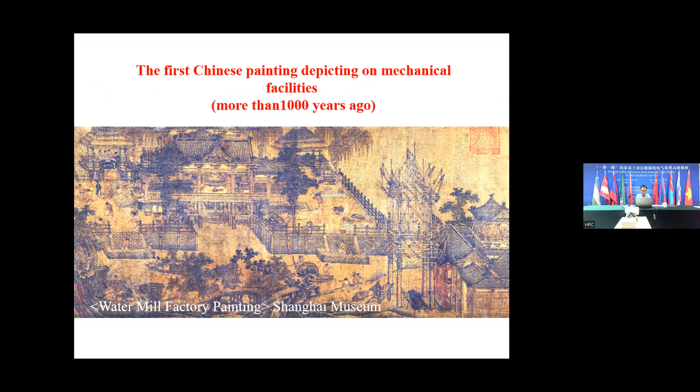Another thing I want to emphasize is this painting, which was collected in the Shanghai Museum. It is the first Chinese painting depicting mechanical facilities, more than 1,000 years old. We could see clearly it is the utilization of the power of rivers. And the modern turbine is also very similar to the hydro, right? It uses the same ways to generate electricity, or uses the power of rivers to get the corn, to get the food.

It is the same as how to use the water to generate electricity, or use the water to make the food. And you can see the water is diverted to the power and generates the electricity; it is quite similar to the sustainable utilization of hydropower. We use the same ways.

And we know hydropower is also very useful for rural electrification. They use the power of rivers to generate electricity and supply it to rural areas, rural communities. The benefit of electrification is mainly in three aspects. First, it's good for health because of indoor air pollution. If you use electricity, there will be no indoor air pollution. Also, we can save a lot of time collecting firewood, so the time budget. And it supports economic growth, especially irrigation and productive activities in rural areas. So these are the three benefits of electricity.

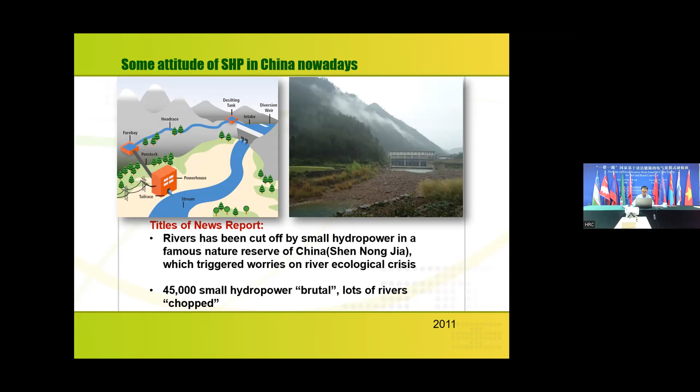But nowadays in China, the attitude towards hydropower has changed quite a lot. In history, it was very useful for rural development. But nowadays, I just cited some titles of news reports, such as rivers have been cut off by small hydropower in a famous nature reserve of China, which triggered worries about a river ecological crisis. Another news title is that more than 45,000 small hydropower stations are brutal and lots of rivers are chopped. But globally, we also see hydropower generation enjoying a very high increase.

So there's a dilemma, right? On one side, we say hydropower is a clean and renewable energy. It is good for rural electrification. It is also at the crossroads of the water and energy nexus. And it is largely emission free. And nowadays, as a lot of renewable energy has been used in our daily life, balancing intermittent renewables such as wind and solar is also a very good function of hydropower.

But on the other side, we know the development of hydropower could reduce the downstream flow, and it changes the hydrological regime of the natural rivers. And if you build a reservoir, there will be some resettlements. And it also leads to intervention into the connectivity of the river system. So there are some advantages of hydropower and also disadvantages.

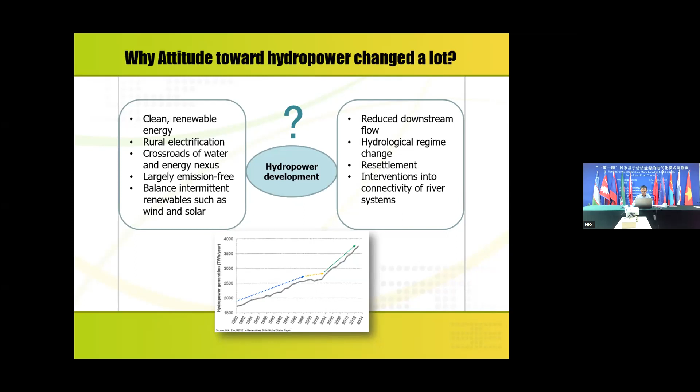But we know there's a very fast increase in installed hydropower generation. So if we want to get more hydropower development, what is our attitude, and to get the ideas of green hydropower, we need to make a deeper analysis of the environmental and social impacts of hydropower.

And talking about the environmental impacts of hydropower, we know different types of hydropower have different impacts. One of the types is the run-of-river type. There's no big reservoir, but it causes a river reach between the dam and the power station, which leads to reduced water or even drying out in this river reach. And if there's a lot of hydropower development in the same river, there might be some cumulative effects of the cascade hydropower development.

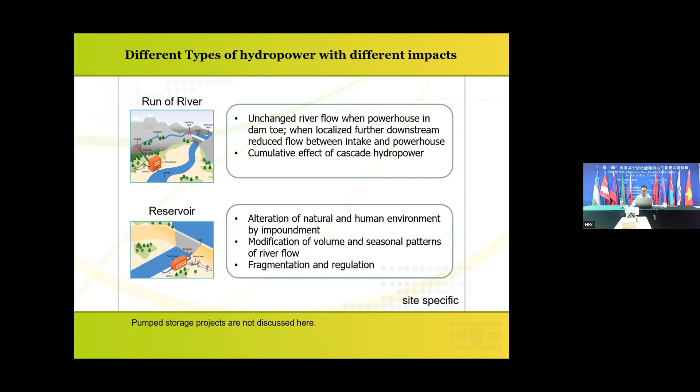Another very typical type of hydropower development is the reservoir, right? We have a big reservoir and the hydropower station just below the dam. It changes the natural and human environment by the impoundment. And the reservoir also modifies the volume and seasonal patterns of the river flow, which causes fragmentation and regulation of the river flow. So these are different impacts by different types of hydropower.

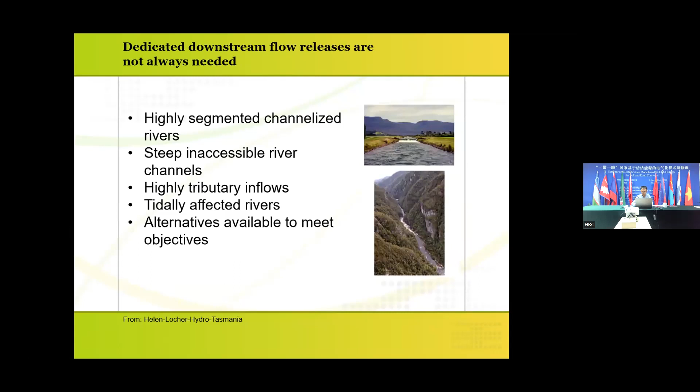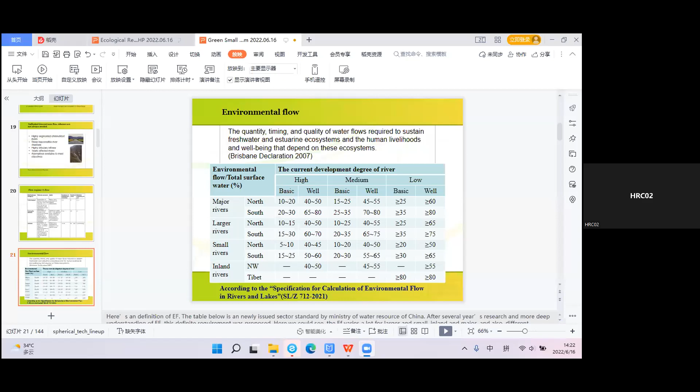Okay. I think you can hear my voice, right? Okay. Well, let's continue. There were some problems with the connection, but now it's okay.

In China, we have already published some standards, which is the specification for calculation of environmental flow in rivers and lakes. And in these standards, there's some recommended environmental flow for major rivers, larger rivers, and small rivers. You know, China is quite large, and it is also decided by the current development degree of the rivers.

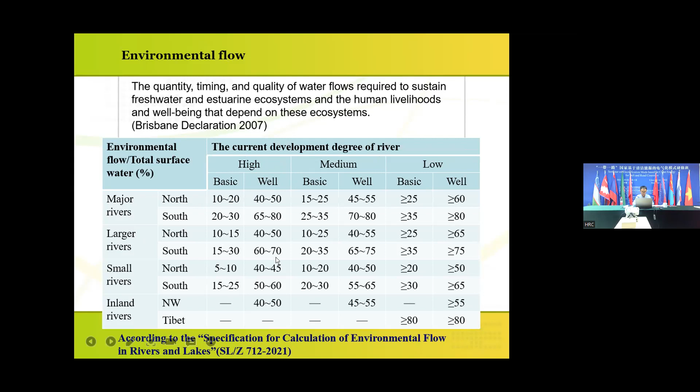For some rivers, the development degree is very high, or medium, or low, with different recommendations of how to calculate the environmental flow.

Another impact of the development of hydropower is called hydropeaking. You know, hydropower plants use the water to generate electricity. Sometimes they start the operation of the hydropower unit, sometimes they close down the hydropower unit. But in the river reach below the hydropower plant, you could see the water level change quite frequently and very fast. That may cause some negative impact on the river reach below the hydropower plants.

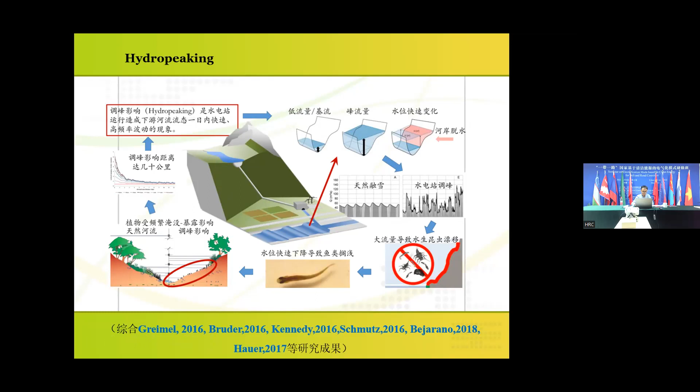There might be some measures for alleviation of the impact of hydropeaking. Maybe they can change the operation of the hydropower plants so it does not change very frequently. There are some universities or institutions focusing on research of hydropeaking. Here is an example, the research base for hydropeaking in Austria. There's a reservoir upstream, and they control the water flow to simulate the impact of hydropeaking to try to find ways to alleviate its impacts.

Another impact of hydropower development is called impoundment, right? When you build a very large, very high dam, the river status is changed from a river to a lake, right? The reservoir is very similar to a lake system. So it is a big change for the water ecosystem.

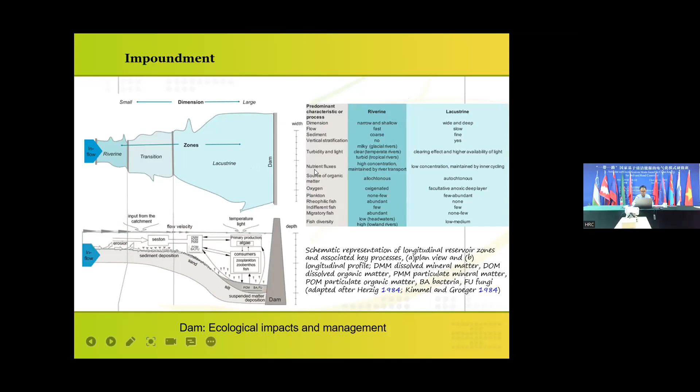And you know, after the building of a lot of dams and projects, the connectivity of the river basin is very highly impacted. A stream corridor with connections among its natural communities promotes the transport of materials and energy and the movement of plants, fish and animals in the river.

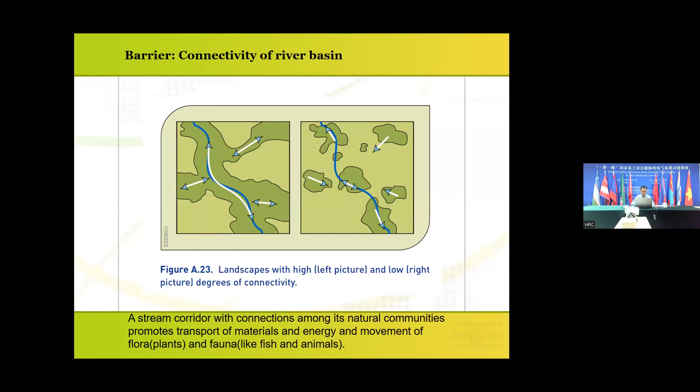There's an example in Mexico. You could see different scenarios, such as the baseline scenario on the left, scenario 21 in the middle, and also scenario 7. These two scenarios have similar installed hydropower units and similar energy capacity, but very different river connectivity. In the middle, scenario 21, the river connectivity is very low, right? Only this part of the river is connected together. But if you develop the hydropower as in scenario 7, the impact on river connectivity is not very high, with similar energy capacity.

That is a very typical example of why we need to think twice about the different developing ways, different scenarios to develop projects. Maybe first these two, and then the other. Which one is developed first? Which one second? Different scenarios, different connectivity. However, we do not only consider the connectivity of the river basin. When considering projects, we take a lot of factors into consideration, such as the grid and the people living nearby. So we need to consider a lot of factors to make the decision.

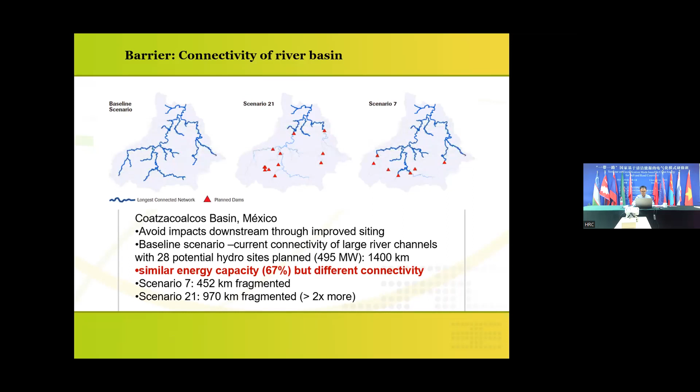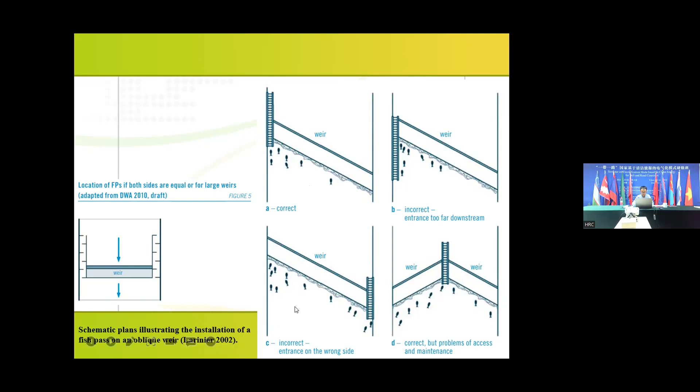There are also some suggestions on how to design the fish passes. Some are correct, and this one is not correct because the entrance is too far downstream. You also need to consider the maintenance of the fish passes. So there are some technical suggestions on how to build fish passes. Another impact is on river morphology.

During the development of the cities and townships, we sometimes seize a lot of the land in the river bed, right? Before, the river bed was quite wide, but nowadays a lot of roads or even some crops are in the river bed, which seizes the space of the rivers. That is also another impact of the development.

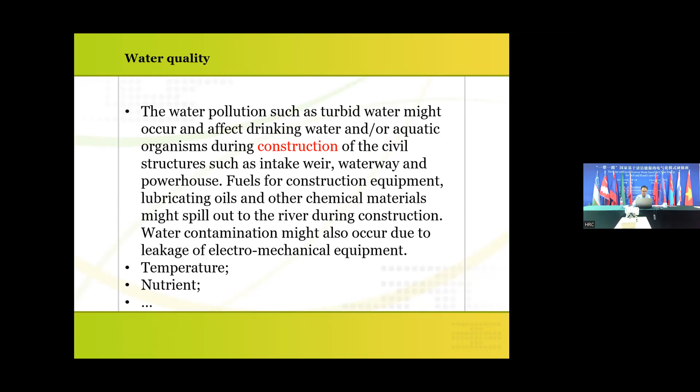And another impact is the water quality. Water pollution, such as turbid water, might occur and affect the drinking water, especially during the construction period. It might also increase the risk of disease when you build a dam or create ponds and the mosquitoes come out.

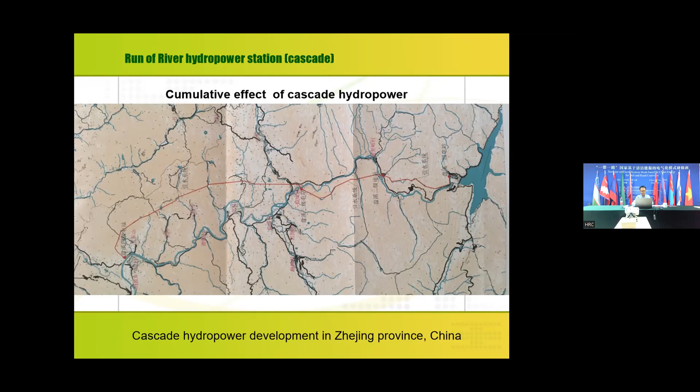Before, we were talking about single projects, but after we build a lot of hydropower projects, there might be some cumulative effects of the cascade development of hydropower. In these examples, along this river reach, you can see a lot of hydropower projects built. They divert the water through the red pipeline or the red tunnel to generate electricity, but leave quite little water in the river. So if you build a lot of these hydropower plants, the impact is cumulative. So we also consider the accumulation effect of the cascade development of hydropower.

Some of the reports have summarized the impacts of hydropower development. Some checklists are good if you need to develop a hydropower plant, such as: is the project consistent with the higher programs, policies or plans? This is very important. You need to first ensure it does not violate the higher programs and policies, such as whether the project is in protected areas like a national park or wildlife protected areas.

Especially in China, some hydropower is built in protected areas because historically the site was not named as a protected area, but after maybe 20 or 30 years, the site of the hydropower plant is named as a protected area. That is a very difficult scenario. So before you build the dam or the hydropower plant, you need to be sure it is not in a protected area, or might not be in the future. Otherwise your project might be removed or retired according to the requirements of environmental protection.

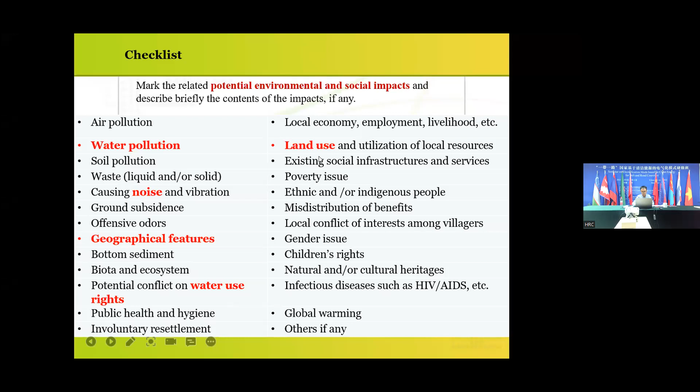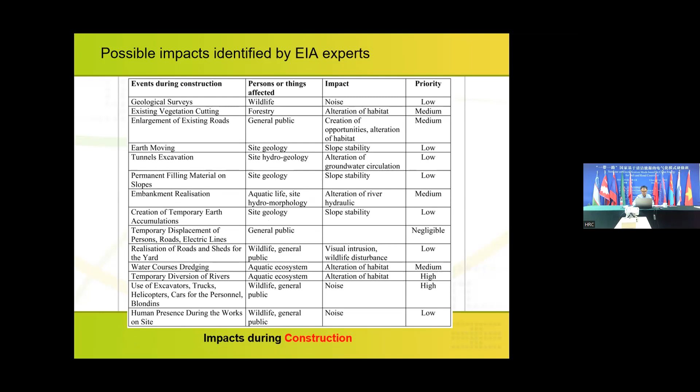Also mark the related potential environmental and social impacts and describe briefly the contents of the impact, such as water pollution during the construction period, the noise, the water use, the land use. Those are factors we need to consider during the construction and development of hydropower plants. This is the summary for the construction period, such as the temporary diversion of rivers, which is a very high priority, and also the human presence during the works on site. The noise impact is low. This is the summary of the possible impacts identified by the environmental impact assessment experts.

We also know some measures to alleviate the impact of hydropower development, such as multiple purposes: not just hydropower generation, but also water supply, irrigation, and flood control. In this example in China, the reservoir is even used as a rowing training base, which is quite good for the multiple purposes of hydropower plants.

Also in China, we have quite strict management of hydropower plants. For example, hydropower plants need to install a minimum flow online monitor. Each hydropower plant needs to have the monitor. Some are online, some are not, but every hydropower plant in China needs to discharge the e-flow, the environmental flow, and almost all hydropower plants have online monitors.

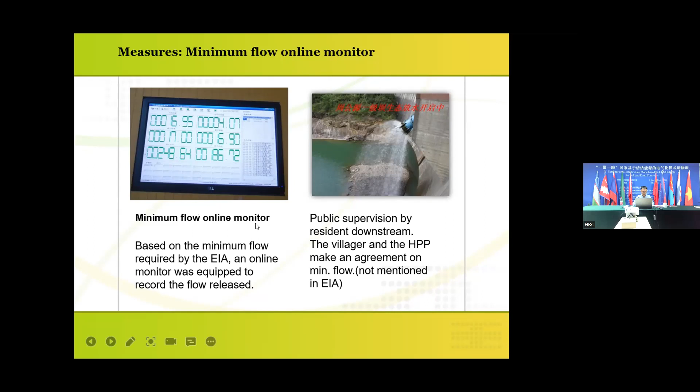Another measure to alleviate the negative impact of the river is to build small, ecological weirs to leave more water in the river reach. Another measure is the ecological operation of the power plants.

From these examples, hydropower is a very typical case of the water-energy nexus. The reservoir is used for water supply, for irrigation, it's good for food and water supply, and it also makes energy generation. So hydropower is a very typical case of the water and energy nexus. It can meet both water and energy needs, which is very important for the whole human society.

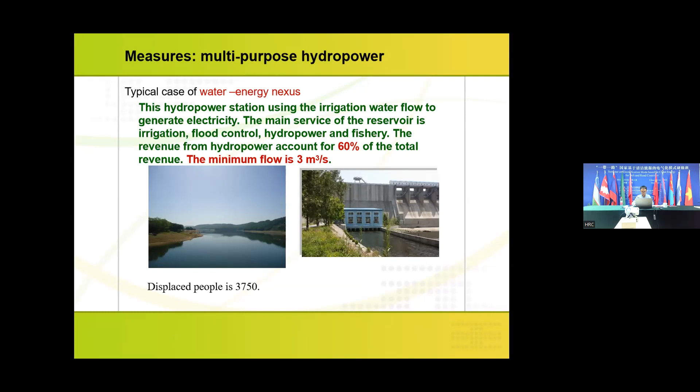There are still about 2.5 billion people who have unreliable or no access to electricity, and 2.8 billion people live in areas of high water stress. If we develop hydropower plants with reservoirs, we could solve these two problems at the same time. That's why we use the water and energy nexus approach to tackle these two problems simultaneously.

For the reservoir, we have a lot of other purposes or functions, such as it could be a national park or water park. It could be good for navigation, irrigation, fishing, flood control, water supply, and generation. So we could consider all these different purposes at the same time. This is very important for sustainable development of hydropower plants.

You may ask why we need green small hydropower. Going back to the beginning of the presentation, we know hydropower on one side has a lot of advantages, and on the other side has a lot of negative impacts - some environmental impacts, some society impacts. If we have green hydropower standards, we can evaluate hydropower, whether it is green or not, and how to make hydropower plants more green. That is why we need green hydropower standards.

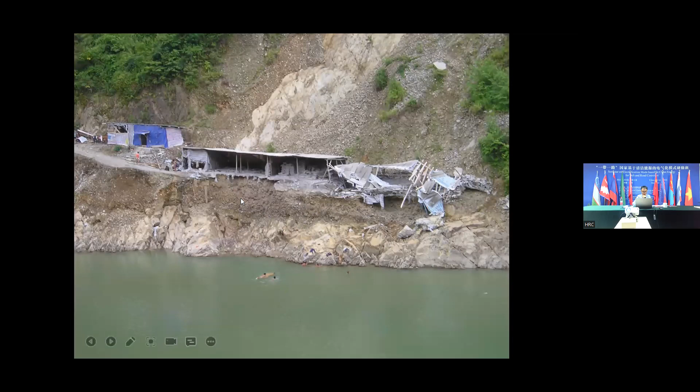For this hydropower station under construction, I had been there before the accident. That is the picture I took one year before the accident happened. That year, the flood went over the dam and destroyed the riverbank. Here you can see the picture. But after one year, there was also a very serious safety accident at that hydropower plant.

In China, the Ministry of Water Resources launched a lot of safety check activities, trying to improve safety levels. Here are some pictures showing the removal of increased parts which are not allowed, in Jiangxi province.

For the owner of the hydropower plant, they want more water to generate more electricity, which means more money. So they might increase the dam height, which is not allowed and not safe. You can also see the lowering of the overflow dam in Shuangshui hydropower plant in Guangdong province. So these are examples of China trying to reduce safety risks.

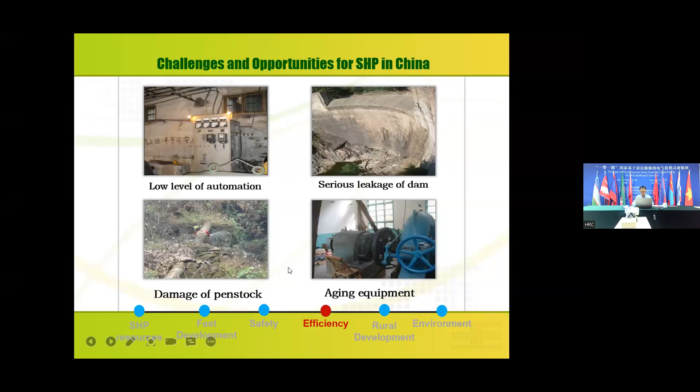The second challenge for China's small hydropower is efficiency. After many years of operation, there is a low level of automation, serious leakage of dams, problems with the penstock, and aging equipment.

Around 2012, China launched a program called Efficiency Improvements and Capacity Addition at Existing Small Hydro Plants. The ministry will give subsidies if you make efficiency improvements and capacity additions, with different subsidies for different regions of China.

Another challenge for China is rural development. China launched a program called the National Small Hydropower Ecological Protection Project, which encourages local farmers not to cut forests or use firewood to cook, but instead use electricity generated by small hydropower. They also enjoy a very cheap electricity price. That is a good way to keep farmers from cutting forests, which is good for protecting the environment and the forests. That is a very typical project in China, which we call the National Small Hydropower Ecological Protection Project.

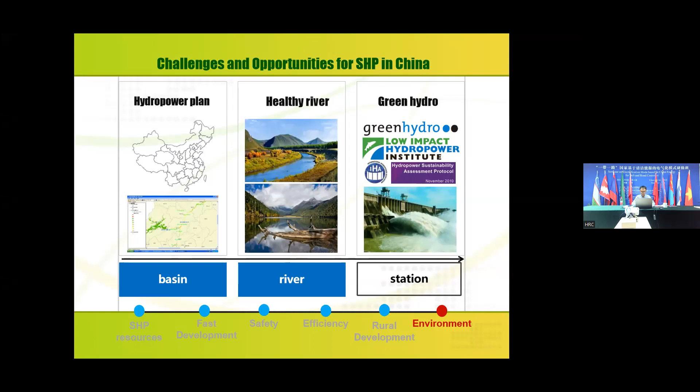At the small hydropower station level, we have learned from the experience of America, Switzerland, and also the Low Impact Hydropower Institute and International Hydropower Association, on green hydropower, trying to solve environmental problems. As I mentioned before, the green hydropower concept is from Switzerland, and the low impact hydropower standards are from America. Also, the IHA, International Hydropower Association, published the Hydropower Sustainability Assessment Protocol in 2010.

There are also other institutions or countries that have developed their own green hydropower standards or similar sustainability standards, such as the Mekong River Commission, which has published guidelines, and Austria, which has developed codes called HYCOM. The International Commission for the Protection of the Danube River, ICPDR, has also published guidelines for developing sustainable hydropower plants.

So I will give a quick introduction about the green hydropower standards published by different institutions or countries.

Here is a summary of all the existing green hydropower standards in the world, like the small hydropower, Green Small Hydropower Assessment Standard published in China in 2017, with a revised version in 2021. Also in Austria, they published standards called HICOM in 2015. For China's version, we learned a lot from the USA and Switzerland. There's also a very good sustainability hydropower protocol published by the International Hydropower Association in 2010.

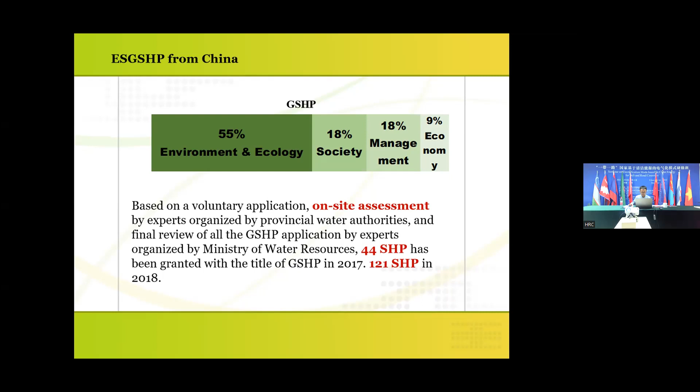55% is focusing on the environment and ecology aspects, 18% on society, 18% on management, and the last 9% on the economy. This evaluation is based on an on-site assessment. Nowadays, in 2018, there are 121... after 5 years of implementation of this assessment, more than 870 hydropower plants have already passed the green hydropower assessment. This is the standard published from Austria.

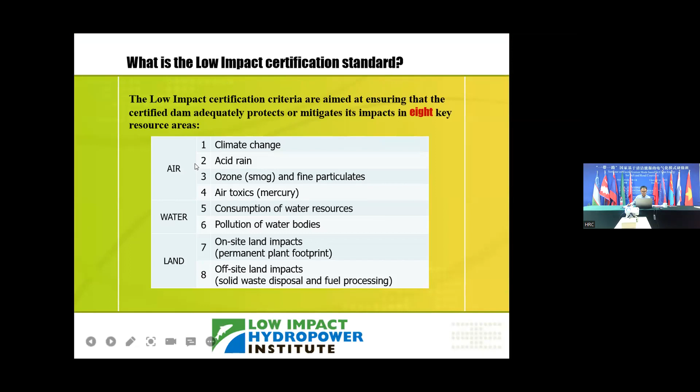This is published from the USA, and it covers 8 aspects, covering air, water, land. It is good, the standard is tough but achievable. It encourages hydropower plants to try to apply for the assessment or certification of low impact certification.

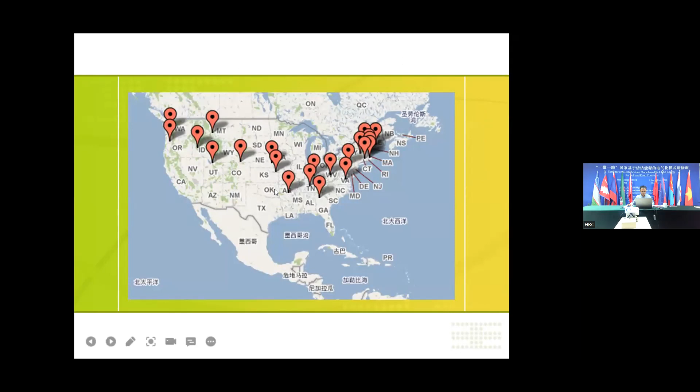A lot of hydropower plants have already been certified by low impact, using a very easy assessment method, like a questionnaire covering flows, water quality, fish passage protection, watershed protection, threatened and endangered species protection, and facility recommended for removal. It also updated the standards in the second version, with some changes to the aspects.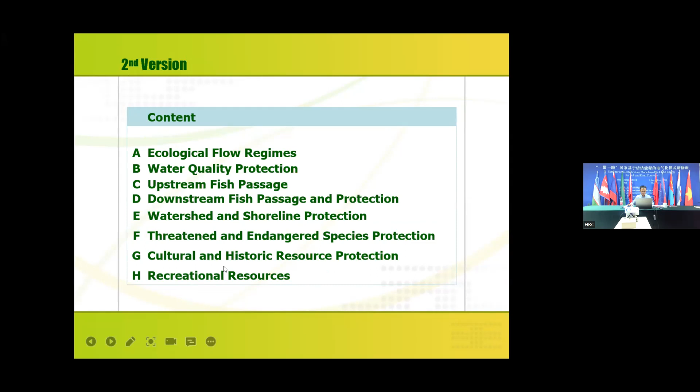There is another standard called the green hydropower standards developed by Switzerland. It considers two aspects: one is people's growing concern for the conservation of natural river ecosystems, and on the other hand, some people are willing to pay extra for so-called green electricity. So this standard is connected together with the green electricity mechanism. The purpose is a new assessment procedure for evaluating environmentally friendly hydropower production.

For green hydro, they have two different levels. One is the eco-labeling scheme for green electricity, and another purpose is to facilitate communication with electricity customers. Because users of electricity do not directly understand the quality of the electricity products, a credible certification of high ecological standards is essential for successful green electricity marketing.

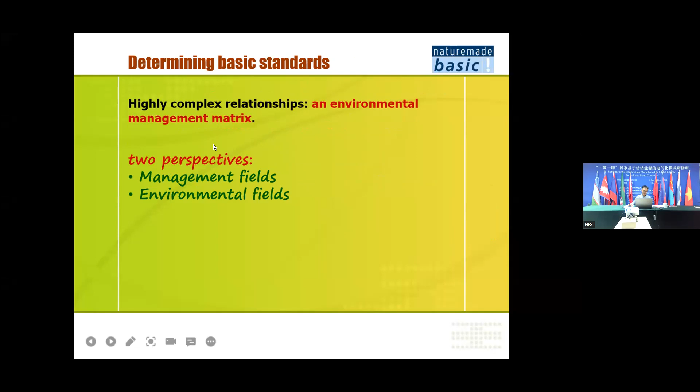For the standards from Switzerland, there are two conditions: one is the basic requirements for green electricity, and the higher level is called eco investments. For the basic standards, it covers two aspects: one is management fields, one is environmental fields.

Here are the standards. The management fields cover the minimum flow, also called eco flow or environmental flow, and also hydro peaking, which I have already talked about before, the impact of hydro peaking, and also reservoir management, bed load management, and power plant design.

For the environmental field, it focuses on hydrological parameters such as hydrological regime change, the modification of river regimes, and the connectivity of the river ecosystem. After you build a lot of dams or weirs, there's also solid material and morphology, landscape, and species, the flora and fauna.

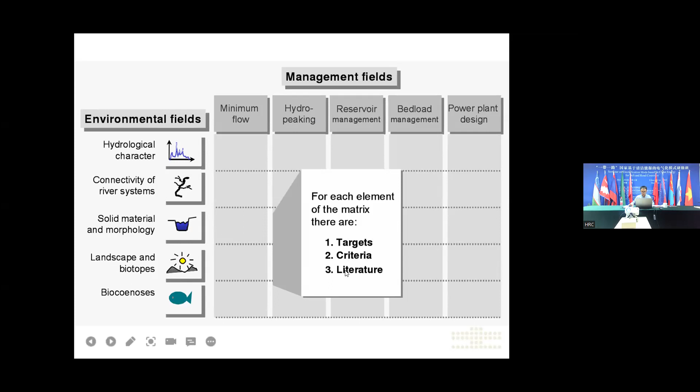For the standards by Switzerland, they have a matrix. For each element of the matrix, they have targets, criteria, literature. You could find the sort of problems and also the measures for the problems.

In short, for the hydropower plant owner, they need to pay the certificate costs and invest in some eco restoration measures, and they can enjoy a good increase in electricity price to subsidize their investments in eco restoration, as well as benefits for their company image. But for the implementation of this mechanism, after more than 16 years, only about 3% of the total hydropower production in Switzerland is certified.

Another standard is from the IHA, International Hydropower Association. They have carried out sustainability guidelines and protocols. These standards cover 4 aspects: environmental, social, technical, and economical perspectives.

But when we look back to the two standards we introduced before, from Switzerland and from the USA, their standards just focus on the environmental aspects. For the standard from IHA, it focuses on 4 different aspects, not only environment, but also social, technical, and economical aspects.

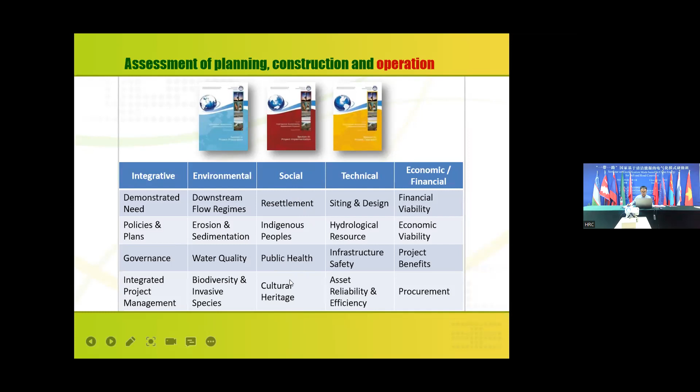In the operation stage, they have several aspects and around 21 indicators, such as the environmental categories. They have downstream flow regimes, water quality, and in the social aspect, they have resettlement, public health, and a lot of indicators trying to make the assessment of the hydropower development. Yes, here is the list. In operations, it is 19 indicators.

And for each indicator, they have 5 levels. Level 1 means there are significant gaps related to basic good practice. Level 5 describes proven best practice on a particular sustainability issue that is demonstrable in multiple country contexts. So from level 1 to level 5, there are different meanings.

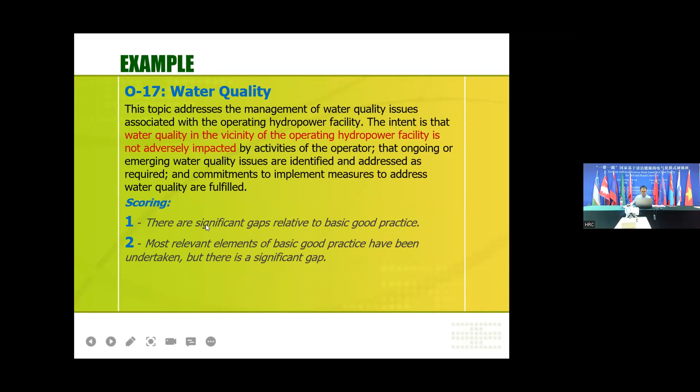For example, for indicator 17, water quality during the operation stage, if the water quality in the vicinity of the operating hydropower facility is not adversely impacted, it could have different scoring for 1, 2 to 3, and also for level 5, in several aspects.

And now I have made some comparison between these different standards, like the scale, whether it is a national standard or international standard, whether it's legally binding or just a recommendation, whether it's covering the whole life cycle or only focusing on the operation stage, whether it is including pumped hydropower plants or not, whether small, medium or large hydropower plants.

So we make a comparison of the different green hydropower standards, trying to find the problems and how to improve the standards. Here in this picture, you can see some of the standards follow pass or fail patterns. The China's version and the standards from the USA are pass or fail. If you pass the assessment, you will get a label called green hydropower or low impact hydropower. But the other standards are not pass or fail.

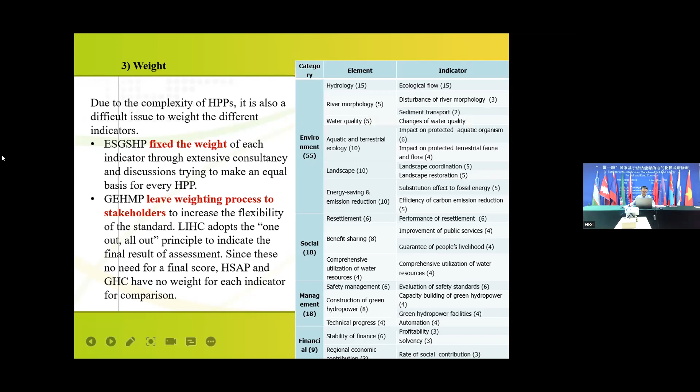For Chinese, we have 55% focusing on the environmental aspects, which is the most important thing. Some of the indicators are very flexible and applicable, and some are quantitative with very specific criteria. Some are largely based on experts' experience. Some are very quantitative indicators.

Yes, here the hydropower sustainability standards and the standards from the USA prefer experts' opinion, but China's version and Hy:con mostly rely on objective and quantitative indicators instead. There's also a comparison of the indicators between different standards. The purpose of this comparison is to identify which indicators are not included in China's version. For example, the hydropeaking impact indicator is not included in China's standards,

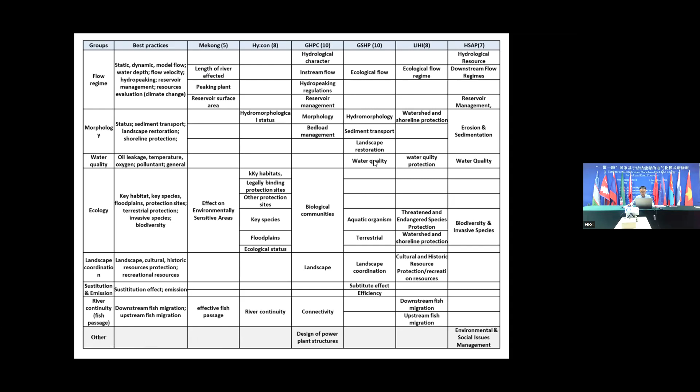because hydropeaking impact is not widely understood in China. So that's why we try to do more research on hydropeaking impact, and maybe in the next revision of the standards, we will include a hydropeaking indicator. And some indicators are not included in China's version because we have other standards designed for them. That's why we make this comparison.

And the organization of green hydropower evaluation is also quite different. China has a typical government-guided mode. But for the other standards, most evaluations are organized by NGOs rather than the government.

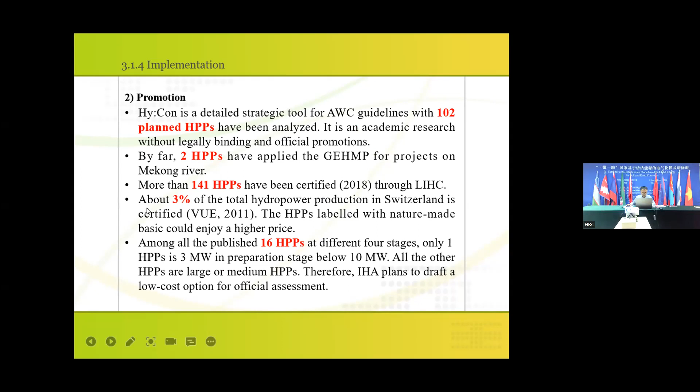And in China, we started the evaluation in 2018, and nowadays there are already 870 hydropower plants that have been certified in 2021. I mean the China version. So that is the introduction about the international practice, their experience.

And another one I want to talk about is the green hydropower practice in China. That is more explanation of China's standards. We have 4 challenges: safety, efficiency, rural development. So this standard is focusing on the environmental challenge in China.

Here's the background of why we need this standard: in 2017, at that time, we only had standards focusing on the plan stage, design stage, construction stage, but we didn't have standards focusing on the environmental assessment during the operation stage. That's why we need to learn from international practice and try to push forward the China's version of green hydropower standard.

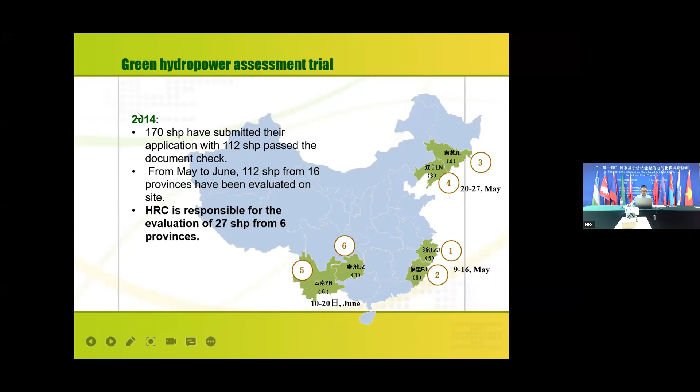After the green hydropower standards were issued officially in 2017, the Ministry of Water Resources started the official assessment. So in 2017, we have the first 44 hydropower plants labeled as green hydropower stations. So that's some work from 2014 with some pilot assessments.

So this is the most important one. It is the 21 indicators of the green hydropower standards in China. If you see, 50% is focusing on environment, 17% society, management, and 9% focusing on economic dynamics. The most important indicator is focusing on the minimum flow. We have talked a lot about the environmental flow, the minimum flow. So this is also the most important indicator, which accounts for 15% of the assessment.

And if the total score is greater than 85 and the hydrology indicator is greater than 12, the hydropower plant will be labeled as a green small hydropower station. But this program is only focusing on existing small hydropower, which means less than 50 megawatts, and it covers 4 aspects and puts a very important weight on the E-flow. But some indicators are not included, such as the fish pass and the hydropeaking, as I talked about before.

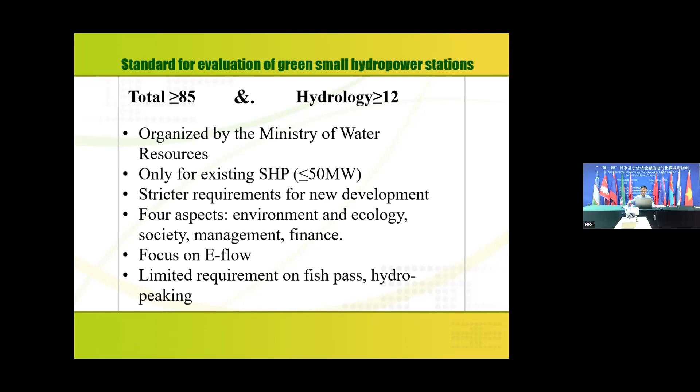And here is a small video. 双河电站位于四川省大邑县西岭镇沙坪村，系江河流域梯级开发引水式水力发电站。电站于

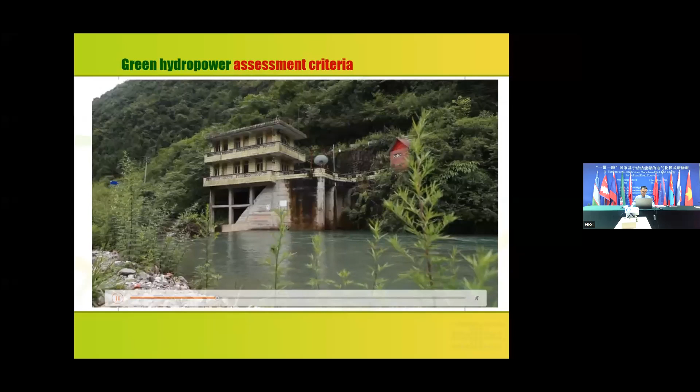Their hydropower plants and how they alleviate the negative impact of hydropower plants, how they make improvements covering the environmental, the management, economic, and also society. So this is a small video introducing one of the hydropower plants which passed the green small hydropower assessment. You can see this is quite an old hydropower plant, which already made the modernization several years before.

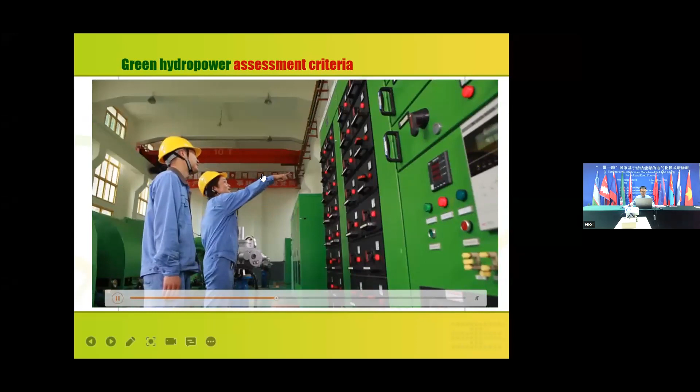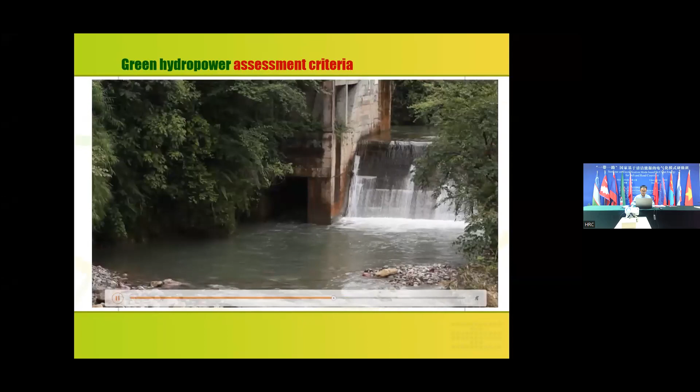So it's not only new hydropower plants that pass this assessment, but some very old hydropower plants could also pass this evaluation after they have made a lot of improvements, alleviated the negative environmental impact, and improved their maintenance levels. So we have 19 indicators on how to evaluate the hydropower plants.

The first is about the degree of using minimum flow. If the hydropower plant is without storage, they could not change the river regimes, so they could directly get 15 points. And if the hydropower plant has storage, which means they might change the water flow, right?

We have talked about it before. If the daily mean flow downstream of the dam or the sluice meets the ecological requirements based on the flow monitoring data, which means they have online monitoring and each day they meet the requirement, they could get 15 scores. There are some examples, where some installed the online monitor of the environmental flow.

And the third indicator is focusing on the change of water quality. Most of the hydropower plants, there's no change of water quality. But the hydropower plant needs to provide some evidence of the water quality, such as some environmental testing reports.

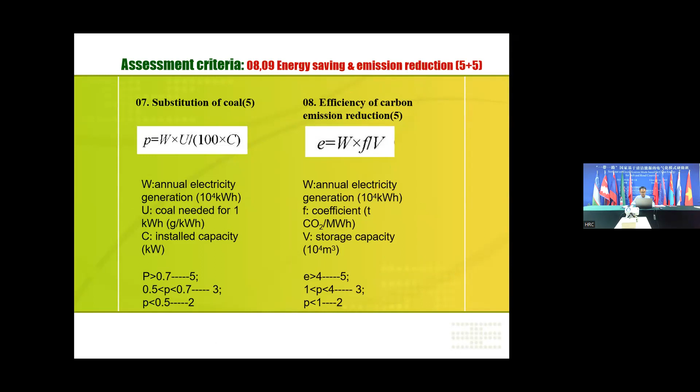The eighth and the next indicator is focusing on the energy saving and the emission reduction. This is quite easy, just provide some of the data, and it could be calculated directly. Use some tools to calculate some of the indicators.

The 10th indicator is focusing on the resettlement. But some hydropower plants, very small ones, without the resettlements, could directly get the scores. And if there are some resettlements, they need to provide the resettlement plan, and also the satisfaction of the resettlements. They need to provide some proofs, such as registration table of the migrants, the compensation receipt, the compensation plan. So this is the 10th indicator focusing on the resettlement.

The 11th, 12th, and the 13th indicator is focusing on the society, which should provide some evidence on the society public service improvements, and also the guarantee of people's livelihoods, such as for some hydropower plants, they have built a bridge for the people living nearby, and also made some employment of the people living nearby. And even for some hydropower plants, they have made agreements with the local inhabitants that they could provide some amount of electricity free every year.

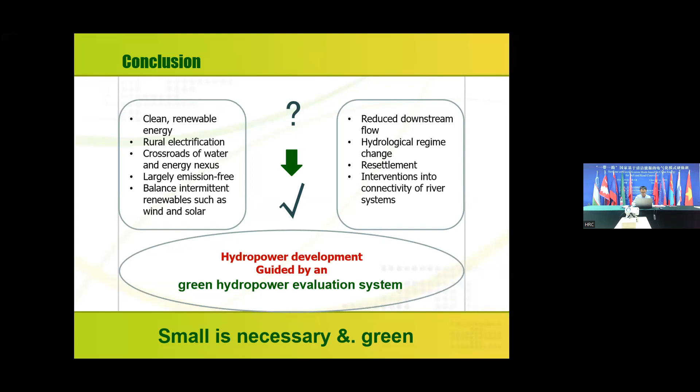Okay, so that is the first part of this afternoon. I have introduced green hydropower standards and talked about the impacts, especially environmental and social impacts, and also introduced some of the international practice. And at last, we spent a lot of time on the green hydropower standard in China, the China's version of green hydropower standards. And next, after we make the evaluation, we want to know how to restore the negative impacts of hydropower development.

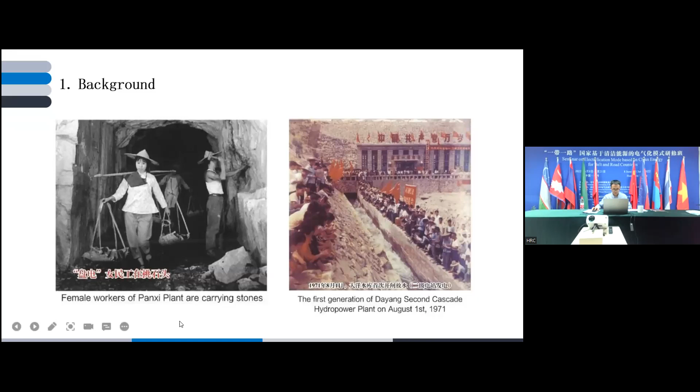And also in the 1970s, after building of the dam and the installation of the small hydropower, rural electrification was accomplished at that time. A lot was used for lighting, for rural irrigation. So it was very useful for rural development at that time. And this is also the picture I have already introduced.

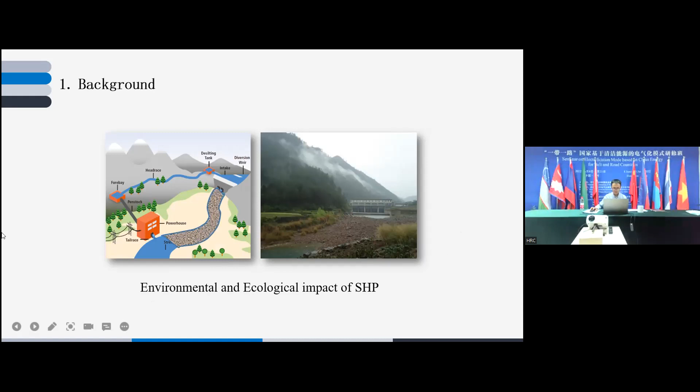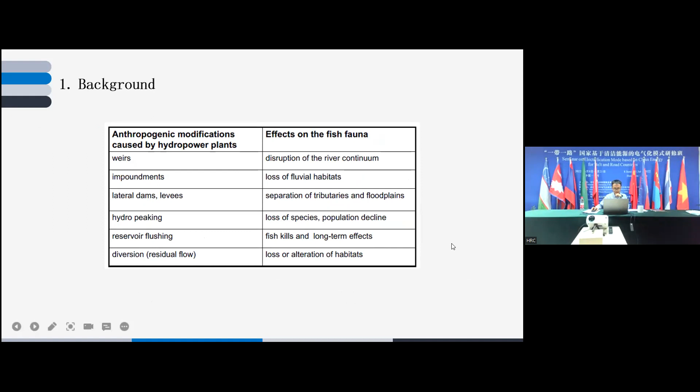We have talked in the first presentation about the environmental and ecological impact of hydropower, and also different types of hydropower developed with different impacts, and also some impacts on the fish, different factors such as the impoundment, hydropeaking, reservoir flushing, diversion of the water flow. But after more than 100 years of development of hydropower, the first hydropower plant in China was in 1912. So the history of China's hydropower development is more than 100 years.

In recent years, a lot of challenges and problems are focusing on environmental mitigation, for which in China, 4 ministries have launched small hydropower greening, especially in the Yangtze River economic belt region, where around half of the hydropower plants in China are located. This program was launched by the Ministry of Water Resources, which is in charge of small hydropower development, and also the National Development and Reform Commission,

the Ministry of Ecology and Environment, and the National Energy Administration. So these four ministries started a program trying to find the problems, identify the negative impacts, and also some problems of licenses and permits, whether you have every permit or whether it is illegal construction. That started from 2018 to 2020.

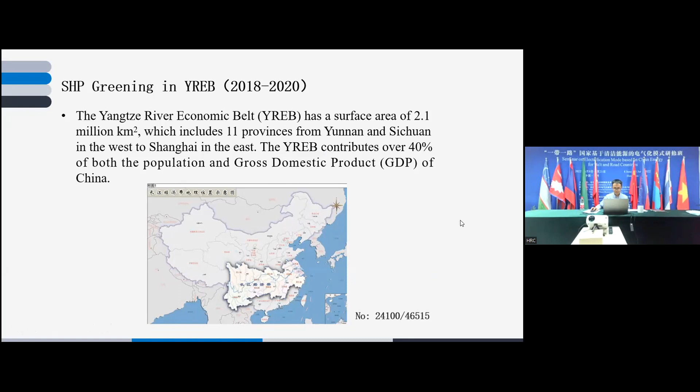And as I talked before, the Yangtze River economic belt has more than half of the hydropower plants, around 24,000 hydropower plants in the Yangtze River Basin. The total hydropower plants in 2018 was around 46,000. The Yangtze River belt region contributes over 40% of both the population and the GDP of China. So it's quite a large area, with a lot of hydropower plants.

And in 2016, President Xi said to make all-out efforts to protect the Yangtze River and forbid large-scale development of the river. So that is the change of river development, which makes all-out efforts to protect the ecology and also the environment of the Yangtze River Basin.

That's why the National Audit Office conducted an audit of 11 provinces in the Yangtze River Basin, and they identified some of the problems, some things that happened that are not allowed, or maybe even illegal, in the Yangtze River belt. First, such as the density of small hydropower development on some reaches of the river is too high.

Maybe just 10 kilometers, there are several hydropower plants that have been developed. And also the newly installed capacity of small hydropower in 5 provinces exceeds the planned goals. We have a plan and then there are different projects, but the newly installed capacity exceeds the planned goals.

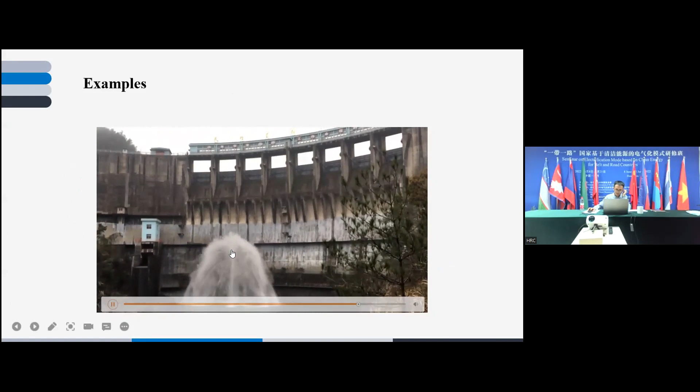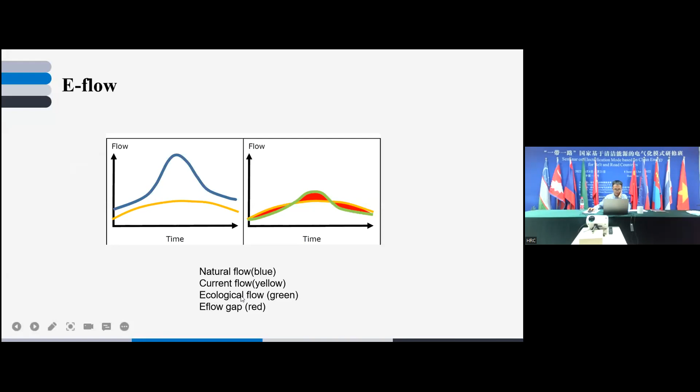And the second part I want to talk about is how to keep the environmental flow. There's also a small video recording the e-flow facility and its valve. They discharge the e-flow below the dam. And we have talked about these pictures, the e-flow operation, the ecological flow, right? And here I also want to emphasize the meaning of the e-flow, the ecological meaning of the e-flow, right?

So that's why we need e-flow. E-flow is not only the minimum flow, it also has patterns. Sometimes you need high flow, sometimes the river ecosystem needs low flow. So it is quite useful for the e-flow.

For how to determine the e-flow, there are a lot of methods, a lot of standards published. In China, we have a specification to calculate environmental flow in rivers and lakes, and also codes and standards for calculation of ecological flow of hydropower plants. In China we have some of these standards.

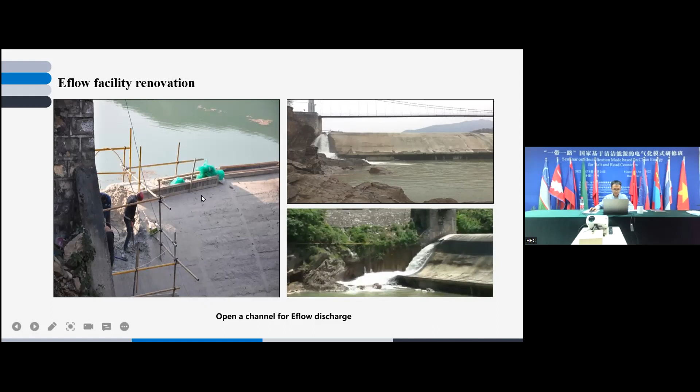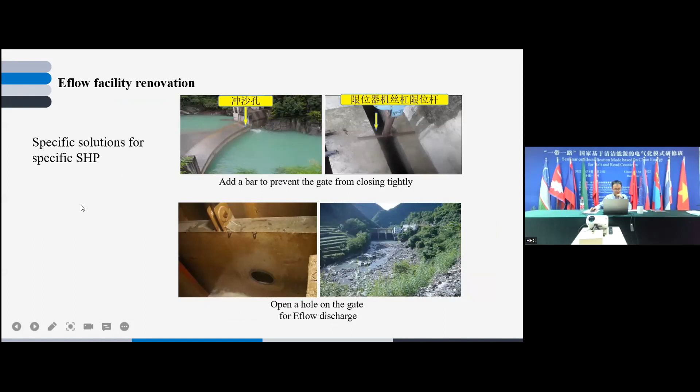And even some discharge facilities open a hole on the gate, like this, for Eflow discharge. Actually this is not good for the safety of the gate, right? But for small gates, it's okay - that's a very low cost measure to maintain the Eflow facility.

We determine the Eflow, we have the Eflow discharge facility, and then the third requirement focuses on Eflow monitoring. Each hydropower plant should have monitoring facilities, and also make information public near the hydropower plants, near the dam.

This place shows, for this specific hydropower plant, the Eflow is 7.57 cubic meters per second, and you could also try to make it public. Also some counties or cities have launched monitoring platforms using cameras or meters, some monitoring facilities.

The fourth measure is eco-operation, another way especially for run-of-river type hydropower plants. They just change the operation modes to eco-operation, ensuring environmental flow, such as the hydropower plants in North China, where state-owned small hydropower discharges the Eflow first.

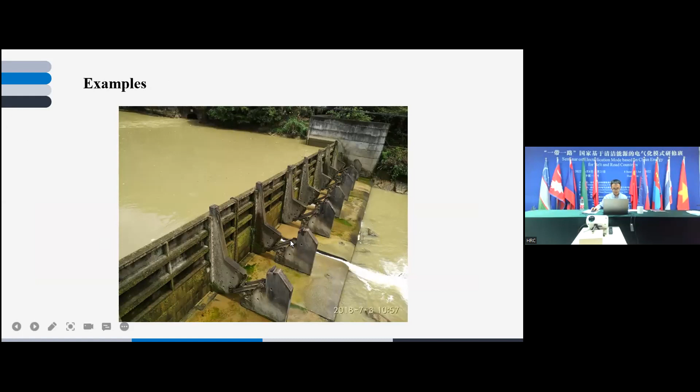There are also examples of making changes to the gate to discharge Eflow. We also try to learn some experience from other countries, and that is the fish pass.

We also learned some experience from a small hydropower plant in Austria. They have had very good experience in how to improve and mitigate the negative impact of the hydropower plant.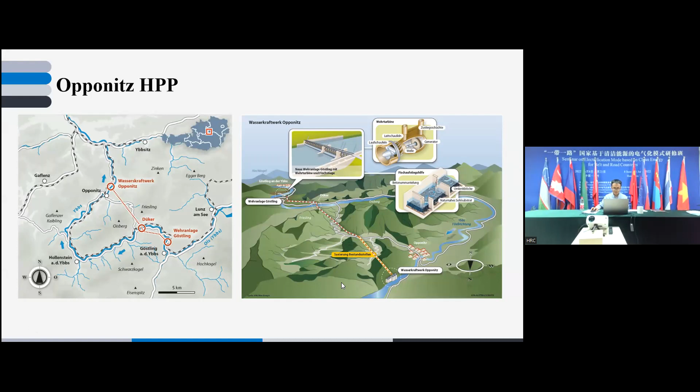What they have done is try to build fish paths near the dam, and also have an ecological unit to discharge the eflow, while at the same time continuing electricity generation. This hydropower plant has a very long history.

It was established in 1921, which means it's 100 years old. In 1994 to 1995, this hydropower plant underwent modernization to improve performance and increase efficiency - new turbines, new generators, and distribution pipelines, new technologies - resulting in increased efficiency, performance, and output.

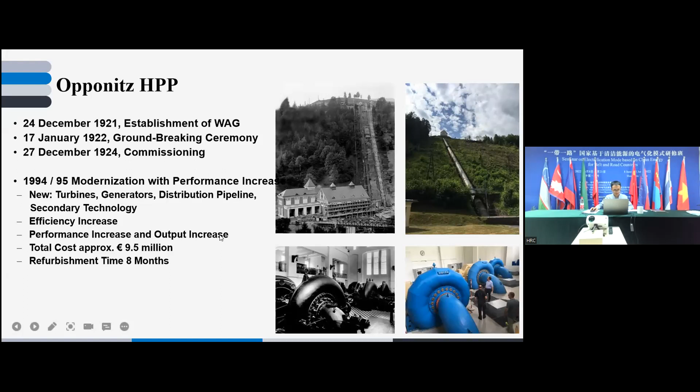We spent 8 months, but this is only focusing on the efficiency increase. But in 2013 to 14, they have made eco-friendly modernization. This hydropower plant has supplied over 25,000 households with energy for nearly 90 years. Actually, it is more than 100 years now.

Apart from the construction of the fish ladder, the weir in Göstling was modernized, and the flood protection was also improved. That is what eco-friendly modernization means. They have done several measures.

Another measure is residue water. The residue water actually is environment flow. In Austria, they try to call it residue water, which means environment flow. Environment flow increased from previously 0.25 cubic meter per second to up to 2.2 cubic meter per second. You could see the increase is very large, and the water volume remaining in the river is now at least 5 times higher.

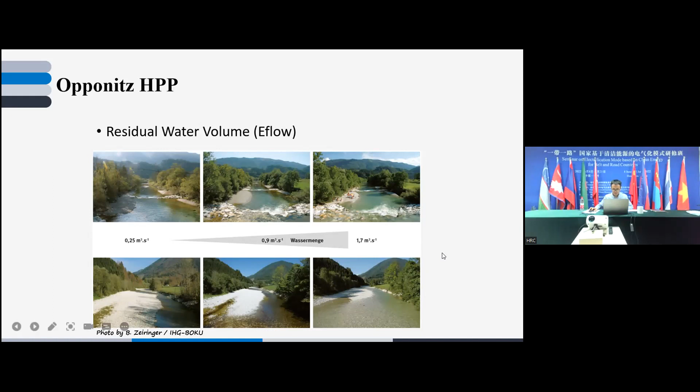They made a lot of preparations, such as the fish ecology investigation by the universities, examination of the overall hydraulic system, presentation of the preliminary projects, pre-examination by the water authorities, and a lot of permits. At last they constructed a rehabilitation of the tunnel and applied for regaining water rights for these hydropower plants. So after more than 1 year of construction, they made the eco-friendly modernization.

They have a new gauge. They made a new small residue water turbine. They use the environment flow to discharge some more electricity and to keep the environment flow discharge.

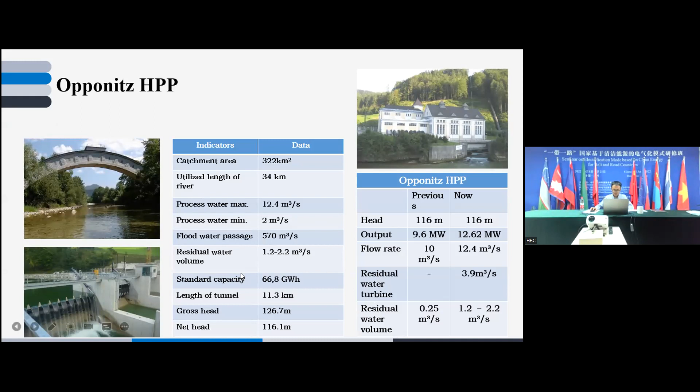The third measure I want to talk about is small hydropower retirement. We have learned some experience from America, because they have published guidelines for retirement of dams and hydraulic facilities, and dam removal science and decision making. In China, in 2003, the Ministry of Water Resources published the management regulations of reservoir downgrading and removal. Also in Zhejiang province, they published the management regulation of small hydropower retirement.

In some counties, they even published the compensation standard for small hydropower retirement to encourage some very old hydropower plants to retire. Also, as I talked before, from 2018 to 2020, China started activities to identify the problems and classify all the hydropower plants into 3 categories.

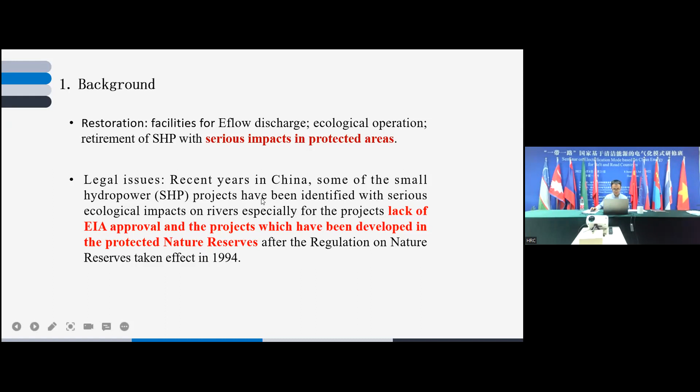One of the categories is retirement, for some hydropower plants with serious impact, especially in protected areas. Some have legal issues, some don't - some are illegal, they don't have the permits.

There's an example of small hydropower plants in Qilian Mountain Nature Reserve. Before, they had 60 hydropower plants. 27 were in the core area, 15 were in the buffer area, and the other hydropower plants were in the transition area. After the retirement, only 2 remain in the core area because they have some water supply or irrigation functions, and all the other 25 hydropower plants in the core area will be removed.

They also made an implementation plan. Some will be retired the same year, some the next year, some in 2021, or even some projects will be retired before 2032 because they have other functions. They need substitution of their functions.

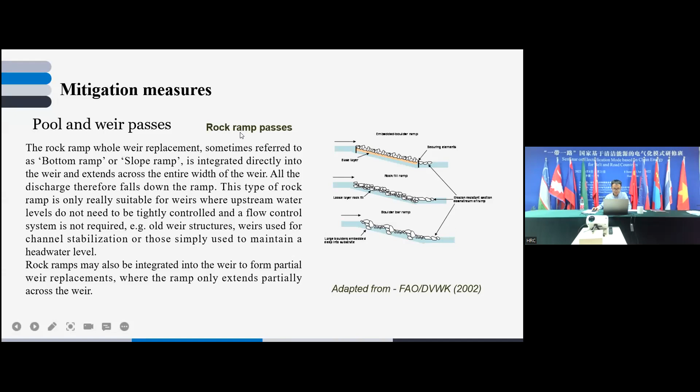We visited this ramp and slope on site. You can see clearly the fish could go upstream through this very low slope, because upstream there's a lake, and one type of fish needs to go upstream to the lake for spawning. That's why they changed the dam to a new ramp, so fish could swim, have some rest, and go upstream easily.

That's a very good example of restoring river connectivity with technical fish paths. We also visited some vertical slot fish paths, where the fish go this way to the upstream.

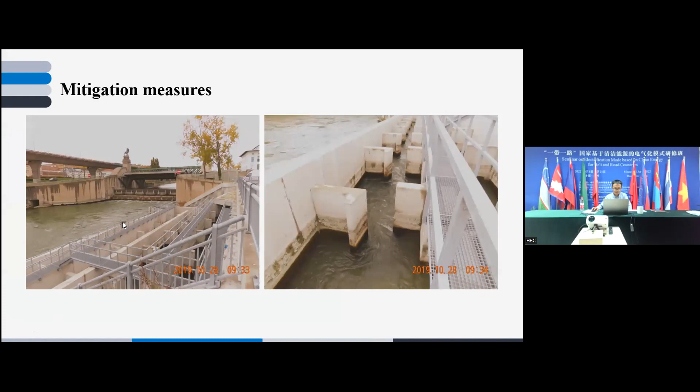Another example of fish paths is an ecological unit. They install a very small unit to discharge water to generate electricity, and at the same time it's a good way to discharge eflow and decrease losses in electricity generation.

Here you can see the ecological unit, located just below the dam. They use the discharge of water for the eflow and also for some electricity generation. This is the fish path.

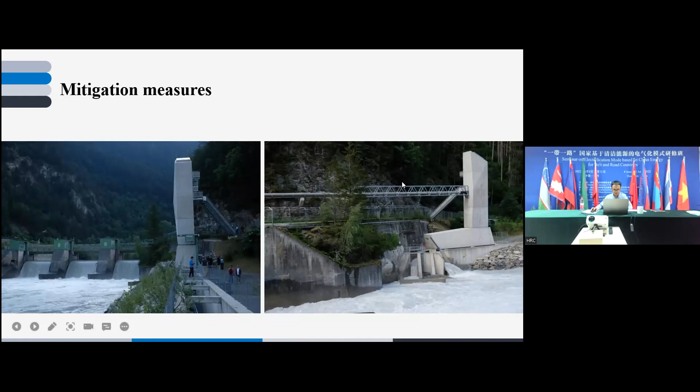Another typical measure is called the fish lift. They use the lift to carry the fish into the fish path, up through this tunnel to the upstream, so they could migrate. Here's another perspective showing the fish going into the fish path lift, going up and upstream.

For downstream migration, we also need measures to avoid fish going into the inlets, which could cause injuries as they pass into the turbine, or to use environmentally friendly fish turbines.

Another mitigation measure concerns structuring the environmental flow section. This is the view from downstream looking upstream. They use groynes inclined against the direction of flow, offset so that a meandering channel line was initiated.

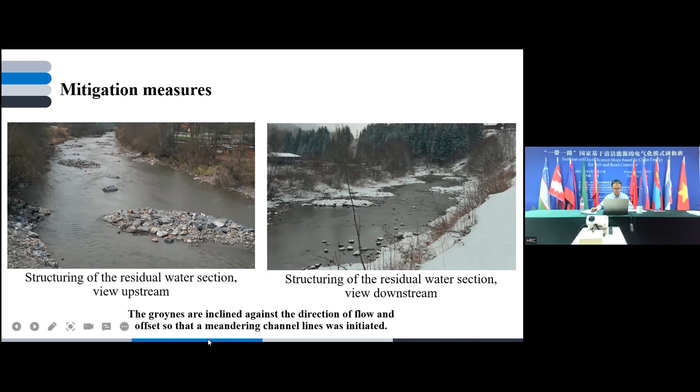Before, we usually tried to build a very straight river ridge, but nowadays we know a meandering river ridge has ecological meaning. Here's another example showing groynes during low water level and during mean water level - useful for the meandering river, and in some places good for fish to rest or even spawn.

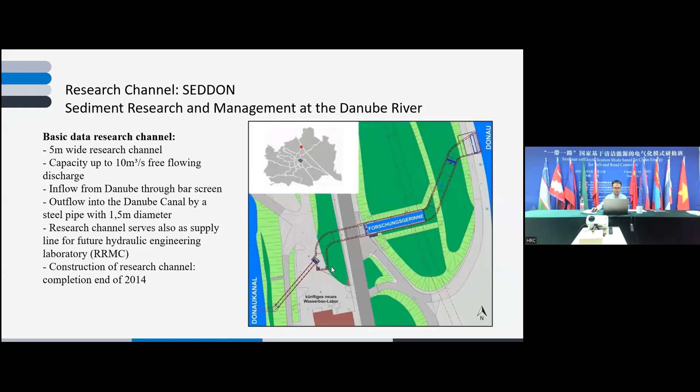This is also a research channel in the Danube River. And there are also examples from Switzerland and Sweden.

In Switzerland and Sweden, there's an institution that initiates stakeholder discussions and a yearly conference between the energy sector and the environmental sector. They also suggest a production loss of 2.3% of total hydropower production for mitigation measures - if you discharge the environmental flow, that means some electricity loss, some production loss.

In Sweden, they set a 20-year plan for mitigation measures, but in China we took just 3 years. In Sweden, they will be adaptable if the energy system changes with new environmental technologies, and they have made a very detailed plan for the mitigation measures.

They also set aside a fund of 1.2 billion in a bond to finance the mitigation measures.